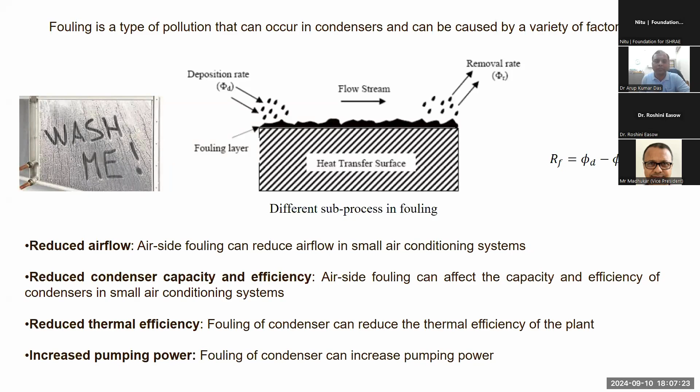I'll give you an idea about the present international research status related to fouling. This research is very important - it talks about the effect of fouling on the air side, evaluating the pressure drop in plate-fin and micro channel coils.

Experimentally, they evaluated this but concluded surprisingly no appreciable effect on heat exchanger pressure drop. This is counter-intuitive, though previously in 2009, Pu et al. said pressure drop actually increases whenever there is fouling. They did experimental work, shown in the bottom figure, for the fin tube heat exchanger, and showed that biofouling decreased the air side heat transfer coefficient as well as increased the pressure drop.

So these two are contradicting views the research community has on air side fouling. When we did this critical review, we found that the dust sizes of these two research efforts were not similar. The distribution of dust size is quite important before coming to a conclusion.

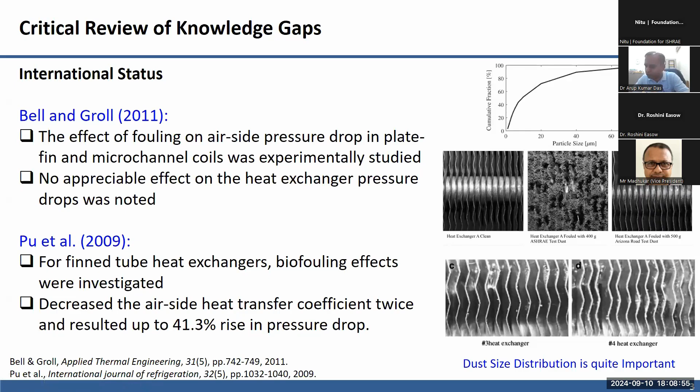There are some other studies which show how important this fouling is. For example, the study by Breuker and Braun back in 1998, done on rooftop air conditioners, showed several types of faults. You can see the fourth one in this row - condenser fouling was also part of the study. In the right-hand figure, condenser fouling takes a very lead role, and the fault intensity may reach its peak somewhere around 30% in peak season.

This is even higher in some cases compared to refrigerant leakage loss. So obviously condenser fouling is not to be ignored, and some numerical analysis has also been done, because in my presentation today I'll be giving some numerical perspective as well. So I thought to touch on the literature review related to the numerical side.

You can see that in 2009, Pelella et al. showed how standalone refrigerant leakage can cause faults in air conditioning plants. But surprisingly, there is no experimental study on fouling faults till date - standalone experimental study reporting fouling is not there.

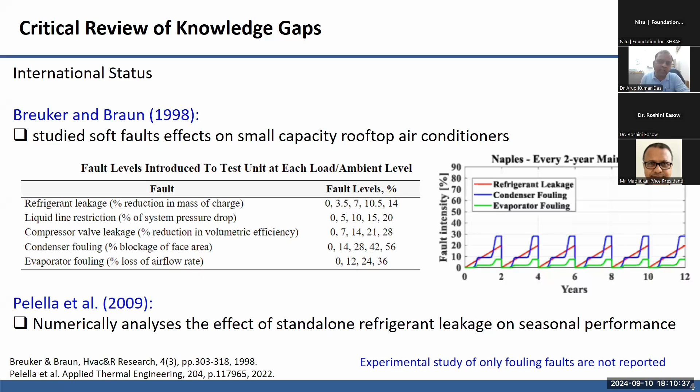To overcome this lacuna in the literature, the Foundation of ISHRAE, Professor Ravikumar, and myself jointly framed the proposal, and it has been accepted by the Foundation of ISHRAE for funding. These were more or less the activities or tasks in the proposal.

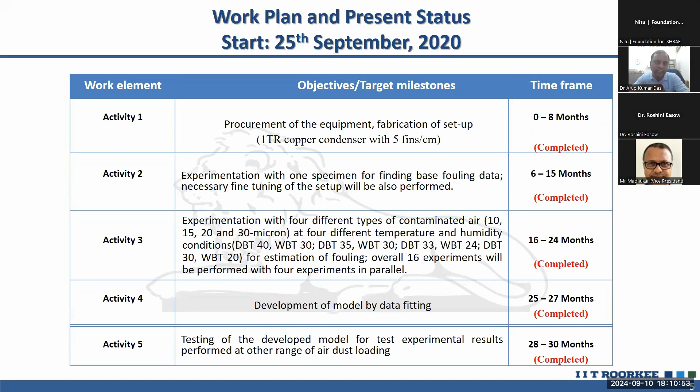The project started on 25th September 2020. You can understand this is in the COVID period only - the second phase of COVID was there at that time.

Activity one was obviously the procurement of the experimental facility and fabrication to set it up. By the way, we took a 1 ton capacity condenser, a copper condenser with 5 fins per centimeter. This was the specification given by the Foundation of ISHRAE at that time.

In activity 2, first with one set of experimental setup, we were supposed to see how fouling varies and if any fine-tuning was needed in the experimental setup, so we had to report the fouling data for at least one set of experimental part.

After getting confidence in activity 2, in activity 3 we parallelized the effort and made 4 different types of experimental setups side by side, where we can test for 4 different types of contaminated air. Mainly we varied the particle diameter - for example, 10 micron to 30 micron we took - and tested for different weather conditions.

The weather conditions given to us were: first, dry bulb temperature 40 and wet bulb temperature 30; next, dry bulb 35 and wet bulb 30; the third, dry bulb 33 and wet bulb 24; and the last, dry bulb 30 and wet bulb 20.

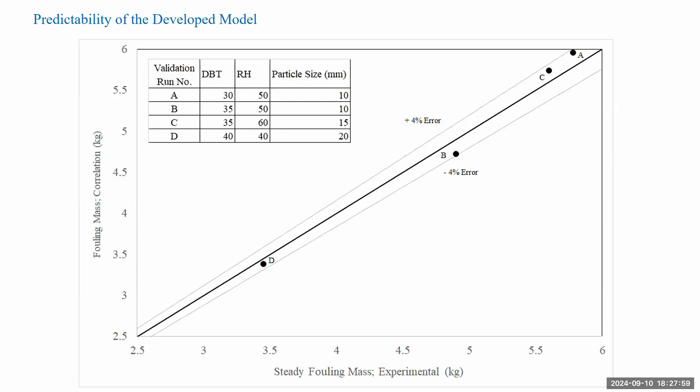Though the numerical effort was not a part of the project, side by side we have also done some numerical analysis. I'll quickly show you some results. You can understand the numerical simulation cannot run for 1.5 months, so this is a very short time simulation, but it has also shown similar kinds of insights as the previous experimental effort.

For that, we have taken this kind of geometry, shown in the top left figure. Air inlet is there, and dust particles enter at the top wall at a particular location from a distance relative to the condenser pipes. We have tested different arrangements of the condenser tube - inline and staggered. A representative mesh is shown in the middle section.

For modeling, we use Eulerian-Lagrangian simulation. The continuum phase, which is air, is resolved by the continuity and momentum equations. The discrete phase, the particles, is solved using Newton's second law. The respective force fields are modeled appropriately so that we get two-way interaction between the models.

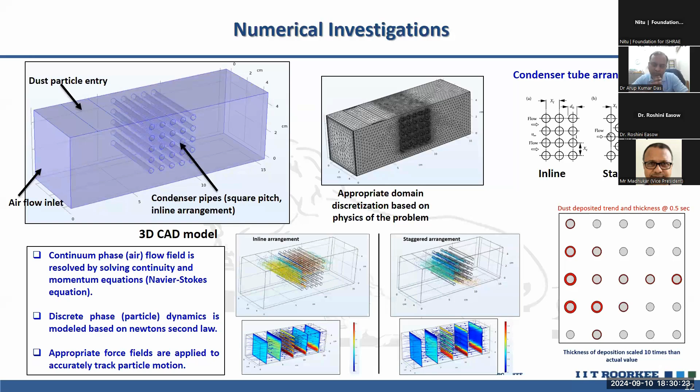On the right hand side is the staggered arrangement, and on the left is the inline arrangement. In the inline arrangement, the dust particle deposition is distributed uniformly, so the front tubes get the higher amount of deposition, but towards the back, due to recirculation, some tubes also get deposited volumes.

These are the different conditions we tested. On the left, we took two different city conditions for New Delhi and Kolkata, with different particle diameters, concentrations, and densities derived from weather station data. This was fed in at the dust hopper as the inlet plane at the top of the geometry. On the right, I've shown the equations used.

The first three equations are the Navier-Stokes equations, with a force field F coming from the particle, and we use the k-epsilon turbulence model to resolve smaller scale eddies in the solution. For the particles, we use Newton's second law, accounting for drag force and gravitational deposition. The drag force calculation is shown in the bottommost equation, with the drag coefficient dependent on the particle's Reynolds number.

The Reynolds number is calculated based on the characteristic diameter of the particle, coming from the particle size distribution for a particular city. By integrating Newton's second law we get the velocity, and integrating again gives the location at the next time step. The forces are calculated and fed into the Navier-Stokes equation.

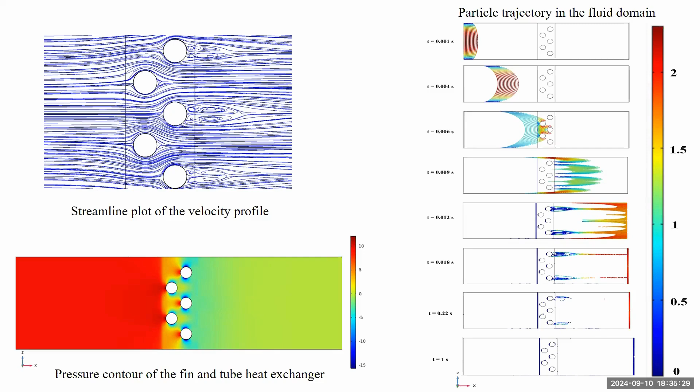You can see that at the bottom side and the top side, we are having higher velocity, which has not faced the tube - this is an empty zone on top and at the bottom of the tube. At the back side, you can see the recirculation is also causing an increase of the velocities, and particles are getting deposited at the right-hand side boundary.

To give you some numbers, these are the fouling thickness variations for different fin size variation, fin spacing variation, and different tube diameter variations, numerically whatever we have found out. We have seen that whenever the fins are getting closer to each other, there is a huge rise in the fouling thickness that is expected, but it is not a linear trend.

This is because fouling from one tube is actually interacting with the fouling from other tubes, and it is getting enhanced, not in a linear fashion. Fouling thickness is also having a role based on the diameter of the tube - this is well understood. You can find out that the highest fouling we have obtained is in the case of some cylinder diameter which is in the intermediate zone.

In the right-hand side figure, you can see the pressure drop for the clean condition and the fouled condition. By the way, the pressure drop contour I have shown you in the previous slide. We calculate the fouling thickness based on the formula shown at the top, which is the volume of particles deposited divided by the area of the surface into the number of particles.

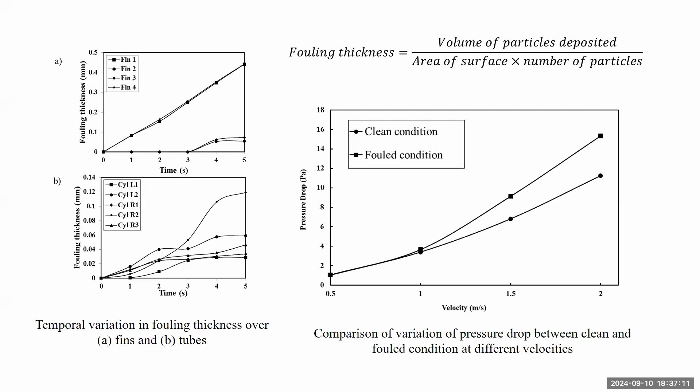So the fouling thickness has been calculated and pictorially shown. And as I just explained, this is increasing the pressure drop, and you can see in some cases towards the end, for high velocity, it is almost a 25 to 50% increase in the pressure.

So these are different deposition fractions. By the way, deposition fraction is a number which we have proposed, which is nothing but, as written at the bottom, mass of the dust particle deposited on the heat exchanger divided by the total mass of the dust injected into the air stream - so how much has actually been staying on the condenser tube.

That is the deposition fraction. We have shown the deposition fraction for two different city conditions, and for different velocities. You can see that both the velocities as well as the weather conditions and the particulate distributions are having a great role to play in this.

In the right-hand side figure, we have shown the rate of reduction of the heat transfer coefficient, and you can find out that even within 3 seconds of simulation, we have found a sort of nearly saturated simulation. Down the line, if you run it longer, obviously it will get a saturated trend.

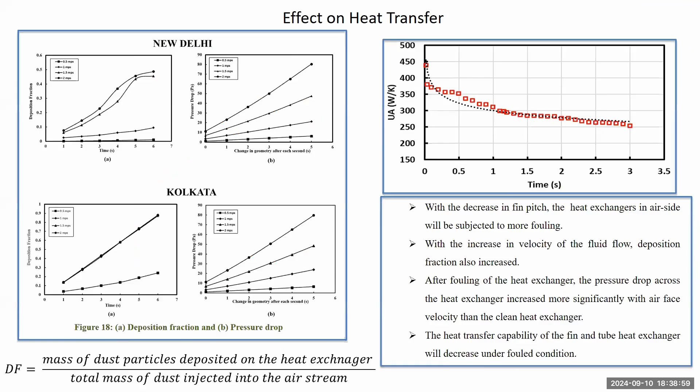Yeah, those have been given by the foundation of ISHRAE members at that time, so this has not been chosen by me. It has been told that these are the conditions which are majorly used in different industries, so that's why these conditions have been given to us. This has not been chosen by us; it has been told to us to do.

There is a question asking about the minimum tonnage of system this maintenance schedule applies to. This experiment has been done for 1 year only. I understand that tonnage may have some effect since size is increasing, which requires more investigation. At present, I am not sure how tonnage affects the fouling, because experiments have not been carried forward.

In all the condensers, the tubes are staggered, yes. In the experiment, the tubes are staggered, and also the fin spacing is a standard one which is available in the market.

Next question: in which software was the simulation performed? I believe it was COMSOL. Yes, the simulation has been performed in COMSOL, which has both Euler and Lagrangian frameworks, so we have used that.

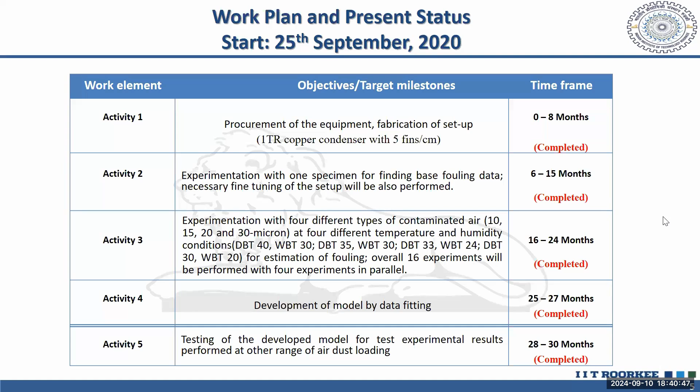If anyone has questions, you can write them in the chat box or the question and answer box. Should I open the chat box? Yes, you can. I can see one more question: is fouling uniform throughout the bundle? No.

I'll show you the pictorial view, though I don't know if you can see it here. Towards the end, when we reach steady state fouling, you'll find it is completely fouled and more or less uniform everywhere. But at the beginning, the tubes at the middle get fouled first, then the corners, then the first row, then the second row, and so on. In the numerical simulation also, I have shown you similar results.

Is this climate simulator lab already existing at your institute? Yes, at IIT Roorkee, even before the project was approved. We do several other works over there using the climate simulator.

Another question: how is fouling calculated according to fin gaps and tube sizes? We have not varied the fin gaps and tube sizes experimentally, only numerically. So experimentally, the role of fin gaps and tube size on fouling mass has not been tested. But numerically, I can tell you that fin gap is very important. If fins have very less gap, fouling will be more, but it's not a linear relationship - it's exponential. As the gap reduces, fouling increases exponentially due to particle-particle interaction between deposits on two fins. Tube sizes also matter, as they stop particles from flowing around, and recirculation and vortices generated around the tube are involved with tube sizes, so these also have an effect. Numerically, we have seen that tube sizes and fin gaps have a great role to play.